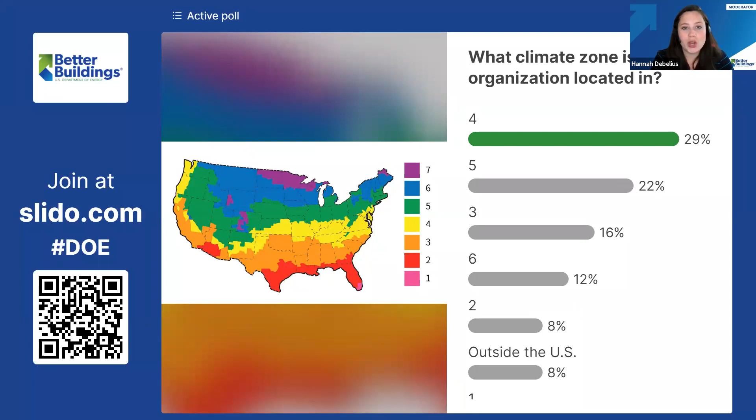Funding and cost, I'm not surprised to see these as top challenges. We see this across decarbonization efforts in commercial buildings. But also leases, heating, that makes sense with the space type we're working with, gas heat, different fuel types for heating. A lot of leases, triple net leases, other types of leases, not being able to control usage, probably working with tenants, hosting a tenant relationship. So a lot of leasing. I'll take this time to say our Green Lease Leaders Recognition Program has just opened applications today, so we'll include something on that.

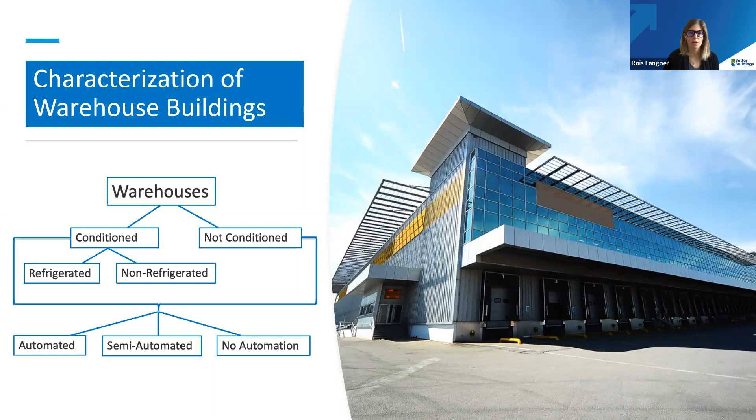Next slide. So just a few fun facts about the warehouse sector that we found in our landscaping study from the 2022 EIA Annual Energy Outlook. Warehouses represent 15.5% of our US commercial building stock. This is about 14.6 billion square feet. And EIA projects that this sector is going to grow by 6 billion square feet in the next 30 years. So we've already seen a significant increase in how many warehouses and distribution center buildings are being built, and we're going to see even more as we move forward in time.

Globally, they do contribute some significant amounts to our CO2 emissions, our greenhouse gas emissions. And thinking about the highest energy demands of these buildings, those are going to be the ones that are fully automated or refrigerated. Refrigerated warehouses can consume an enormous amount of energy, in particular if they're located in a very hot climate zone. On average, they consume about 85.3 kBTU per square foot per year. Let's compare this number to an energy efficient office building or a net zero office building, which would be in the 20 kBTU per square foot per year range.

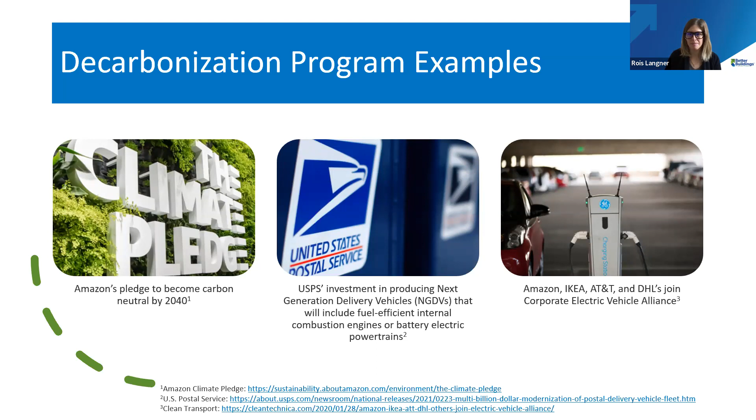They have a zero energy warehouse in Maryland. There's another zero energy warehouse in North Carolina for the National Institute of Environmental Health Science. And the outdoor recreation company REI has a zero energy building in Goodyear, Arizona. Erica Weeks, who will be talking right after me, will also be talking about REI and a different zero energy warehouse building - that'll be a great case study for everyone to hear.

Through our engagement with our stakeholders, we've really honed in on what additional needs this group has. It was great to see all of your interests, everyone on the call today, in this space as well.

What we've pulled away initially is that there is still a need for design guidance. I'd say the most important one is this integration of systems and controls, which I'll talk about more. Retrofit strategies - what can we do with existing buildings? How do we strategically integrate renewable storage and emergency generation?

There's definitely a need for more case studies, which I think this call is going to fulfill with Erica's talk coming up, and better dissemination of this information so that we can really have greater engagement with the warehouse distribution center sector.

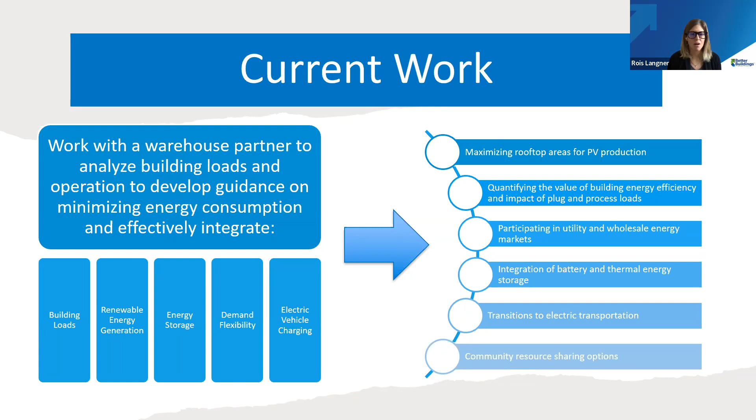We're also thinking through some initial design guidance and what that looks like. I've put these slides up to show you what we're thinking, but also as action items you might want to take to the table if you're on a design team, a building owner, or even a tenant, just to understand where the opportunities really lie.

So energy efficiency: if we can improve our building envelope, we can increase comfort for both non-conditioned and conditioned buildings, and refrigerated, it will help lower additional loads for heating and cooling required in the building. If we have a good envelope, we can reduce the size of our HVAC system equipment and potentially some refrigeration too, if it's really well insulated.

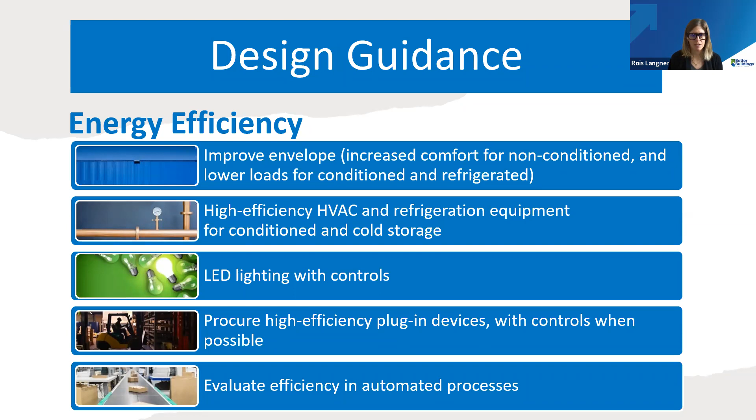But integrating high efficiency HVAC and refrigeration equipment is key. Again, LED lighting—I think there's a lot of buildings that still don't have LED lights, and this is low hanging fruit that could be easily picked. Procuring high efficiency plug-in devices with controls when possible, so can we have timing of when batteries are charged in-house, or things can turn off when they're not being used? There's also a lot in the automated processes that can be evaluated for efficiency. I know a lot of logistics companies have teams of people looking into how to really increase the efficiency of their automated processes, but that is a really key component.

Next slide. So on top of all these systems, and how you really curate the most energy efficient systems in the buildings, then comes the controls. There's really two parts of this. One is the integration—how do we really integrate all of these different components of the building, not just the building loads, but the on-site renewable energy generation, storage, EV charge management. And then how do we continually manage the building for peak demand, and make sure we're operating in a more optimal way.

This does require sub-meters. I know that was a topic that came up, and it does require diligent facility managers to keep an eye on what's happening. There's a lot of software systems out there that make this easier for facility managers to control, monitor, and optimize that process as well.

Next slide. Lastly, I think Erica will touch on a lot more of these additional actions you can take. I've mentioned the first two multiple times, but just thinking through what types of utility programs are available for the building. Are there wholesale energy markets to participate in? Is there any potential to share some of the renewable energy resources with adjacent communities or buildings? And let's also think about the employees as far as occupant comfort and improving access to public transportation to and from a warehouse. These are just a few examples.

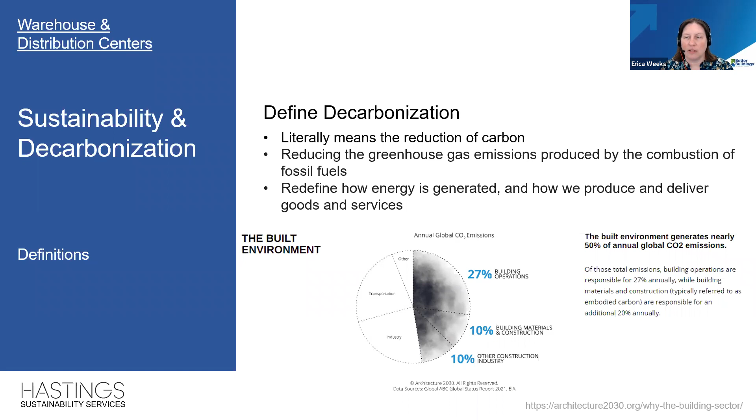Again, we talk a lot about baselines and benchmarking and how to set these targets. Operational energy savings, of course, people will talk about that when they talk about their return on investment—we might make a choice based on something we're purchasing today for new construction, and what is it going to save us in the 10, 15, 50 years we are going to work and operate that building. When we use these baselines and benchmarks, we also rely on a lot of industry standards. When we're looking at energy particularly, we look at ASHRAE 90.1 baselines, particularly for things like LEED projects, understanding that baseline, basic code, versus how we're creating a better building performance-wise, doing that analysis early on to see what we can capture from a cost-saving standpoint.

Now with the newer conversations regarding operational greenhouse emissions reductions, we layer in different calculations using our eGRID tables for the US. Different regions of the country have different grid mixes, and how much of the actual energy coming to our building is being sourced affects the greenhouse gas emissions we are posting once in the building. There's a lot of talk about electrification—no fossil fuels for heating, reheating, or generating hot water. In areas of the country with mandates or changing regulations regarding fossil fuel use, how do we look at these big spaces, hundreds of thousands to millions of square feet, from a cooling and heating aspect, differently than the typical rooftop units with gas-fired reheat? Then extending into water savings beyond just low flow and low flush fixtures—there's a lot of energy used to pump and get water to these project sites, so by saving water on site and utilizing roof area, we're helping our carbon metrics by saving energy from water being pumped instead of using water we already have on site. And then construction materials, of course, are part of the conversation about what we make and manufacture to build those particular buildings—I'll go through a detailed example on that.

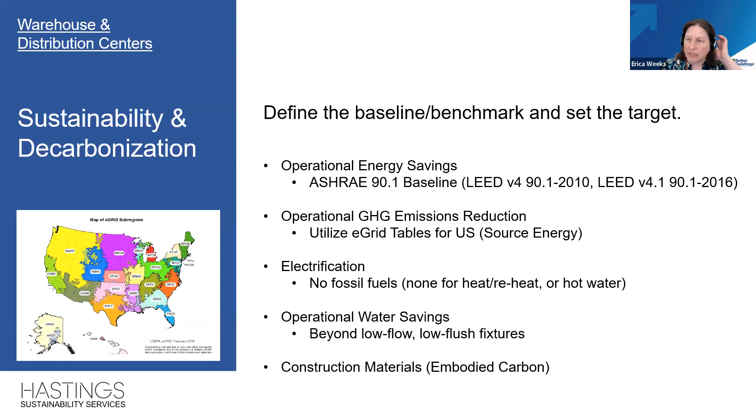Again, definitions matter here, trying to wrap our heads around these zero carbon, net zero carbon, and carbon neutral definitions that are out in the industry, which ASHRAE is seeking to align for the construction industry. Hopefully in the near future there will be working groups on that, but right now we rely on different rating system definitions. So working with customers and clients, figuring out when they say we want to decarbonize, we want to be zero carbon, we want to be carbon neutral, how do we look at that from an actual project application standpoint?

LEED has a particular zero carbon certification, which is based on operational energy data. So those folks in the existing building realm, where you're able to monitor how much energy is delivered to your project site, as well as look at your occupant transportation via surveys or other means of transit available to you. And that calculation looks particularly at...

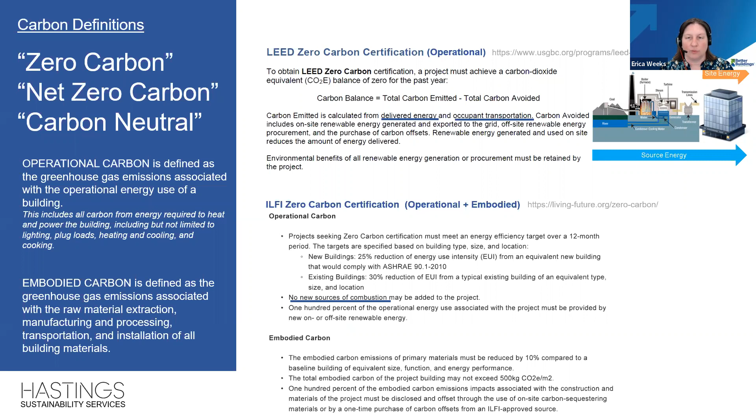source-based energy, so we're looking all the way back to that point of generation, versus International Living Future's zero carbon certification, which looks at operational energy as well as embodied energy, but at the site level. It also looks at no source of combustion, so no fossil fuels, and how much we're utilizing renewable energy once we get on site. So when folks come to us talking about decarbonization, there's a lot to unpack, just understanding what our actual targets and goals are, which helps us move into the actual design and collaboration with our engineering teams on the projects.

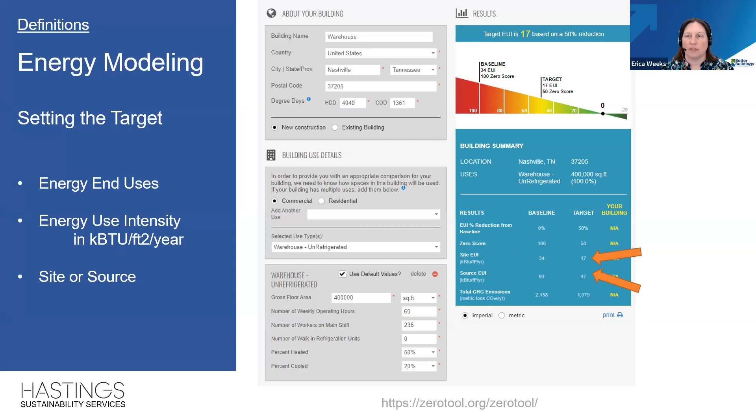We do use a lot of different tools and methods. The first thing we typically do is use a tool called Zero Tool, which is also part of the A&E industry's Architecture 2030. It uses a CBECS 2003 baseline, which is a little different than Energy Star's newer baselines, but it gives us a rough way to take an order-of-magnitude snapshot based on the location and type of building, and gross square footage, to start setting your initial EUI, or energy use intensity, in kBTU per square foot per year. This gives us a way, looking historically at projects we've built and modeled, to look at new projects and see where we're aligned and what types of systems we might use. It doesn't give us the answers, it gives us a target to say how do we actually get to one of these different goals.

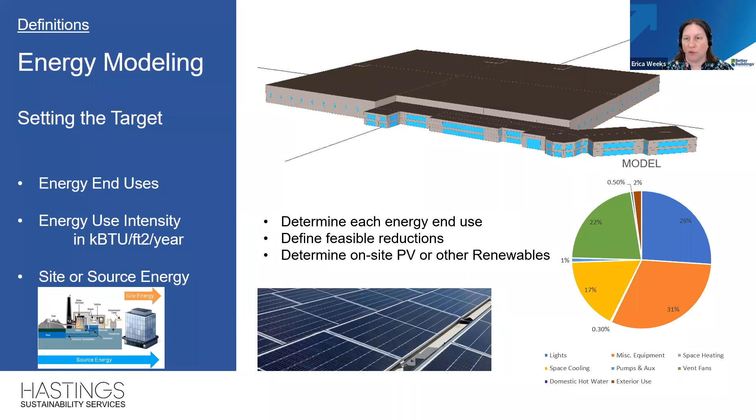Once we start this targeted process and determine how things like lighting will really impact the building, we can also start talking about other variables. Rose mentioned the use of LED lighting in existing buildings.

Today we're talking a lot about skylighting and side lighting in different areas of these warehouse distribution centers, knowing that there's shift work that might happen overnight when the lights have to be on. But can we optimize where some skylighting or side lighting would be, so we're not having lights on during daylight hours, also giving people the human factor benefit of daylighting within these large, sometimes quite cavernous, building spaces.

From this analysis, we also start to look at different viable HVAC systems. Part of that electrification conversation: would natural gas be our go-to, our typical choice, if we were building the same box every time? What are the different options?

And then there's also the conversation about the sweet spot for PV installation. Are we looking to cover the full roof and get a full offset—an annual zero energy project—or are we optimizing for the peak? We look at the shift, or the time of day when the most energy is being used, and try to balance by not utilizing the whole roof for PV, but a portion of it, to save on first costs, as well as looking at the viability of battery backup for other times of day that might use that excess instead of giving it back to the grid.

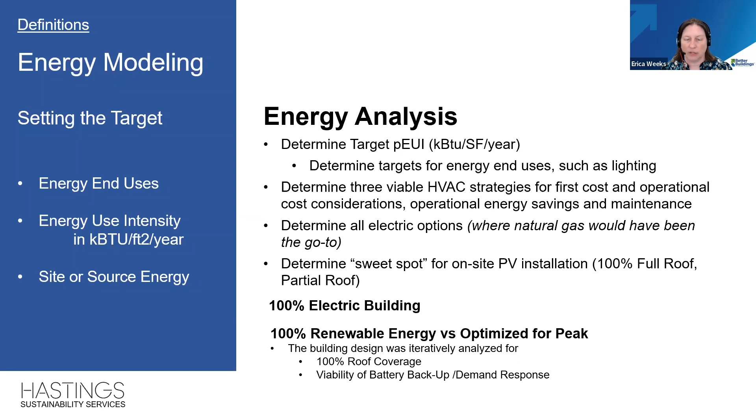This takes quite a bit of team effort between your MEP teams and your process engineering teams.

This is just one snipped example of an analysis we did on a recent project, where we looked at a good baseline, and then what would be better if we went to an all-electric system, which gets into our reheat becoming more of a hydronic water-based system. That looks at different cost, installation time, and maintenance than folks might be used to. Then what's the best system—in this case we were assessing whether geothermal would make sense on this particular project—with the MEP engineers and electrical engineers giving pros and cons to the equipment requirements and field work requirements.

This was a LEED project, so we looked at how we're comparing ourselves to that ASHRAE 90.1 2010 baseline from a straight energy cost savings standpoint, and then layering on how we optimize some PV so that we're balancing out energy use at peak, as well as earning additional energy cost savings that contribute to our overall LEED scorecard.

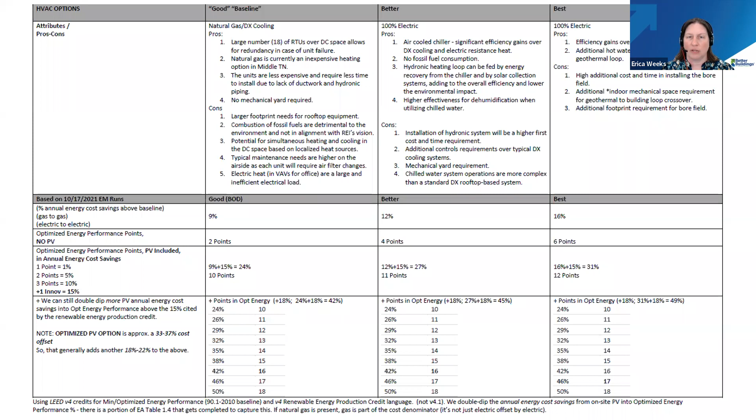Then we can tie this back to the carbon balance, thinking through our grid energy back to that source, because there are places in the US where your grid is much cleaner and greener than in other places.

When we look at what electricity is being purchased and how that electricity is made, the same amount of electricity in two different locations of the country, with two different grid mixes, might have two different total carbon emissions. So if we're looking at offsite renewable energy purchase, are we purchasing it in our same e-grid region, or in a different region? How are we creating that balance?

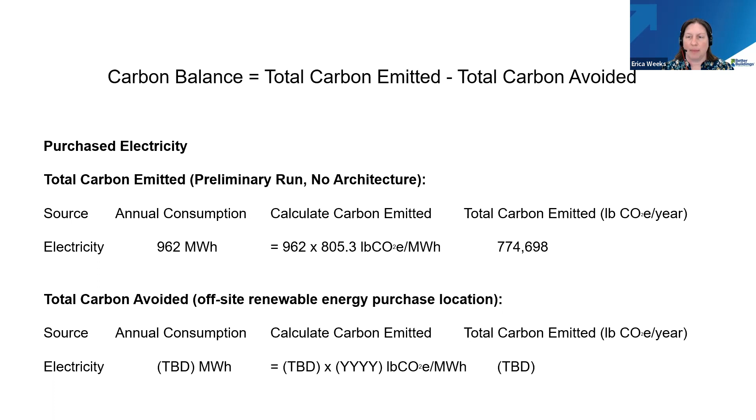So really looking at the investment that the owner of this project was making to apply on-site solar for offsetting their full distribution process in this building, and also pursuing LEED as a third-party rating system component of that.

When we talk about embodied carbon, this gets into the new wave of creating low energy, net zero buildings from an operational standpoint. What are we doing about the materials we select to make these buildings out of, which are typically a limited palette: wall concrete for slabs, roof joists, steel, roofing materials, and maybe some different materials for smaller office pods on the interior of a typical distribution center.

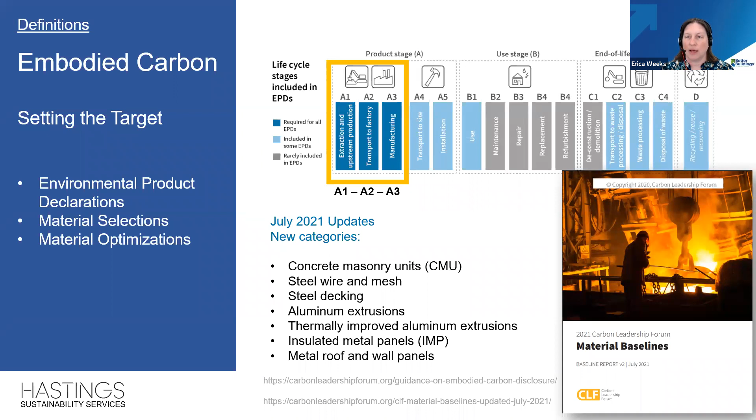If you go to the next slide—we create a baseline calculation based on the amount of material we're anticipating, and then we look at the actual: what are we specifying, what are we getting, where is our steel coming from, is it coming from an EAF mill? So we look at what materials are the industry baseline versus what we're getting that is better, that we can specify and ensure is coming from a more friendly resource with less global warming emissions.

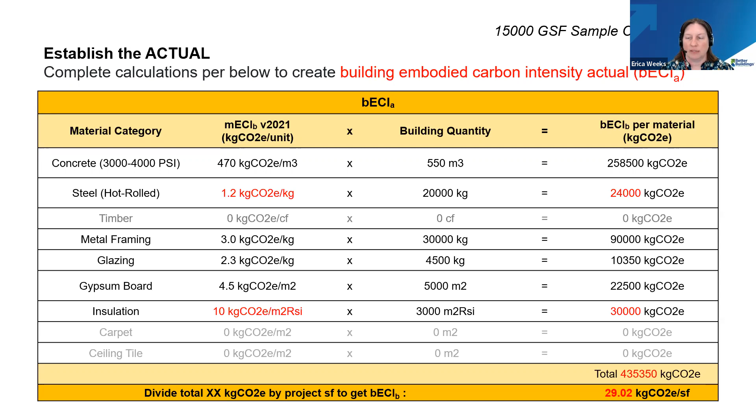Next slide. We put together this calculation to come up with a total project embodied carbon reduction, using the methodology from the LEED pilot credit for procurement of low carbon construction materials. It's pretty straightforward when you look at the amount of materials you have, and you can even do it in a highlighted way, taking a bay or portion of your building to do a quick analysis so you understand where your specifications may need to adjust.

We're fortunate in Middle Tennessee to have great concrete related resources that our mix designs can employ to have a lower amount of cement, so we can get a lower amount of embodied carbon within our concrete here from a variety of different sources. Next slide.

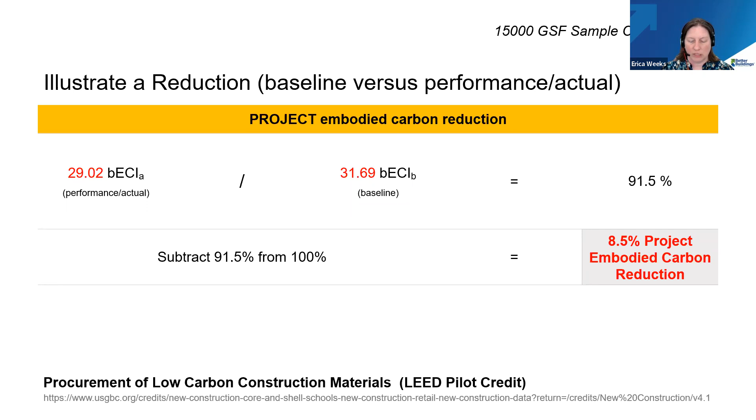One of the important things I mentioned at the top was we're getting a lot more focus on water and rainwater collection for toilet flushing. These distribution centers are sometimes put in out of the way places, and a lot of infrastructure comes to the site, so we're really looking at what energy we're expending by extending that infrastructure. More and more, with customers and clients that have higher sustainability goals, when we're building in these greenfield off the beaten path locations, there's not a lot of LEED points we can get for site and location.

So how do we make up that balance? We're finding very strong appetites for folks to do rainwater collection for toilet flushing in their main locker room or office areas, where 3 shifts a day of 100 or so people are flushing toilets, and we're getting a great return on investment because we aren't purchasing that water coming to the site—we're using what we can collect because we have such a large roof area. There's a cost to the cisterns, pumping, and annual maintenance, but otherwise it's a great system to consider, along with that layer of pump energy for getting water to site. You're using it right on site, so you're already getting a big reduction by not having to continually pump that water. Next slide.

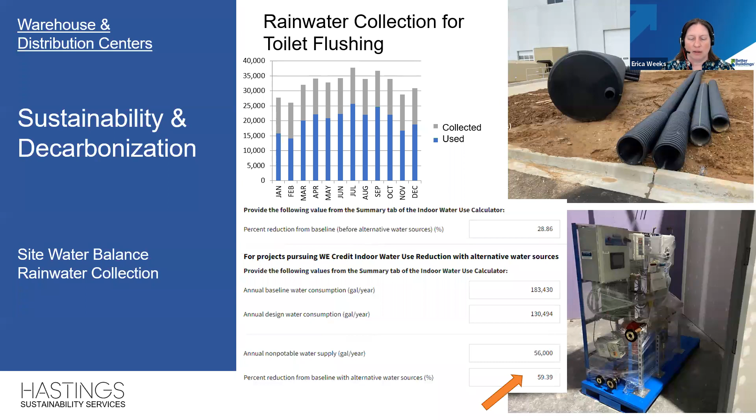When we talk about human factors and the quality of spaces and places, we're spending quite a bit of time talking about daylight and views, creating different pockets of spaces within distribution areas where people can see out, see the passage of time, see clouds and sky. Also, coordinating skylights around PV and other rooftop equipment, saving energy through daylight sensors and daylight harvesting from skylight daylight reaching the distribution center floor.

Biophilic design is a great topic, looking at how we're infusing visual cues to nature to give people moments of respite. Universal design features allow utilizing everything in the project building regardless of abilities. Indoor air quality is especially a hot topic post the last couple years, looking at air filtration, where air is coming from, outdoor air distribution, recirculation, and how we're metering or monitoring air quality throughout different areas of facilities.

Tying back to materials, ingredient transparency is a strong component. What are we applying as material finishes? Are those finishes backed by third-party certifications, so we know the ingredient transparency has gone through vetting of things called red list materials? And how are we applying that for the benefit of occupants interacting with those materials on a daily basis?

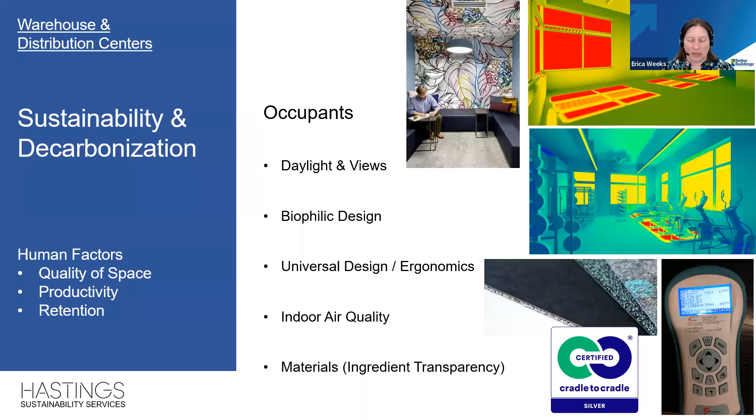Something like indoor air quality, for example, how would we select that as a qualitative measure? It doesn't necessarily support our carbon neutral goal, because we might be thinking about different components of indoor air quality, like filtration or other things. But how do you then communicate why you particularly do something in your facility versus another facility?

I'll end on this: as Rose mentioned, we're working on a 4th distribution center for REI here in Tennessee. This will be an all-electric facility. It will also be a zero waste facility into operations, and it will use renewable energy to optimize its peak load when completed. It's under construction and will open in the fall. There's a lot of emphasis on skylights, daylights, and side lights, supporting employee and occupant engagement, as well as selection of materials for a lower embodied carbon footprint.